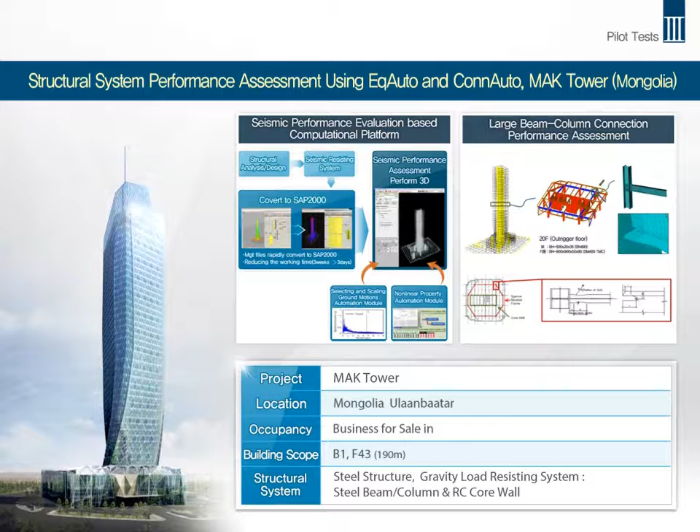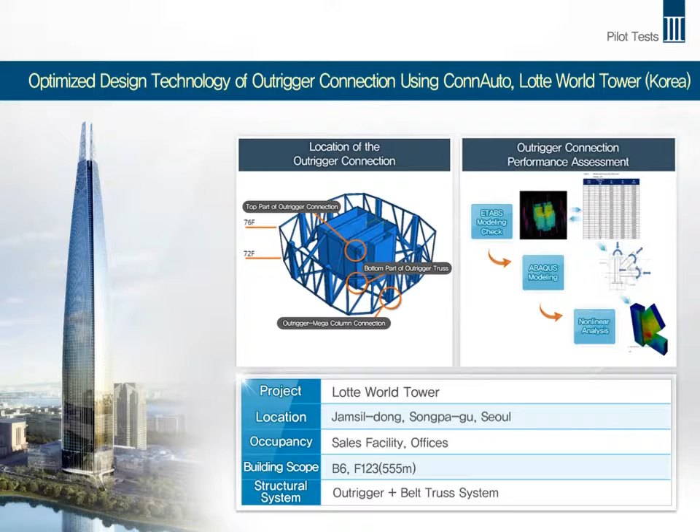Moreover, outrigger joint detail design was performed on the 555-meter-high Lotte World Tower, which will be the tallest building in Korea once completed. In other words, detailed design of complex structural parameters took approximately 70% less time by using the ConnAuto application. The optimal decision was automatically made from a variety of alternatives proposed by the ConnAuto.

This is a data processing platform of an atypical integrated design. Currently, this technology is being applied internationally on large-scale projects. The technology was applied on the 283-meter-high M Tower for optimizing the cross-section size and concrete strength of columns in the super tall building. Total structural frame cost was reduced by 13% by repetitively analyzing thousands of propositions.

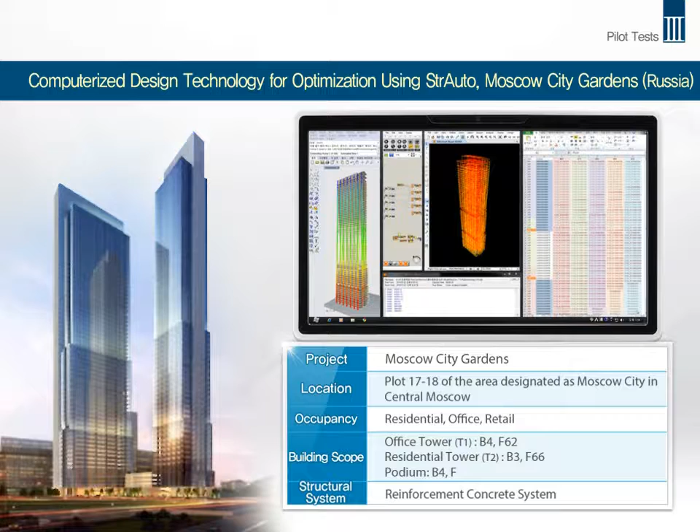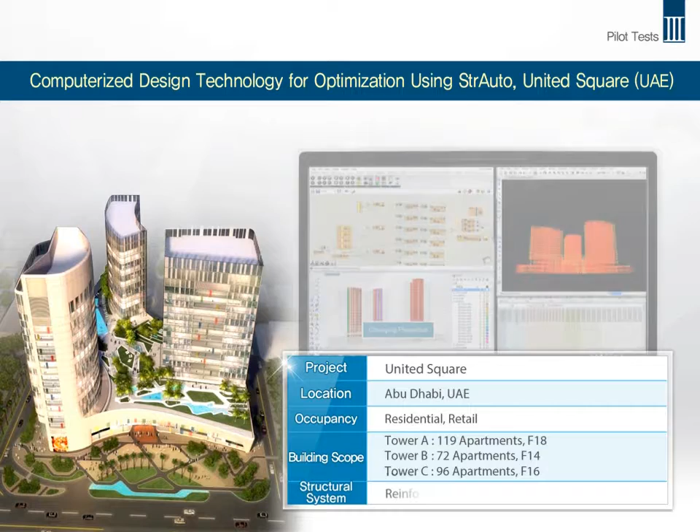The next example is United Square of International Capital Trading in Abu Dhabi. $3 million was saved in the construction by optimizing rebar detail design, load design, concrete strength, and rebar strength.

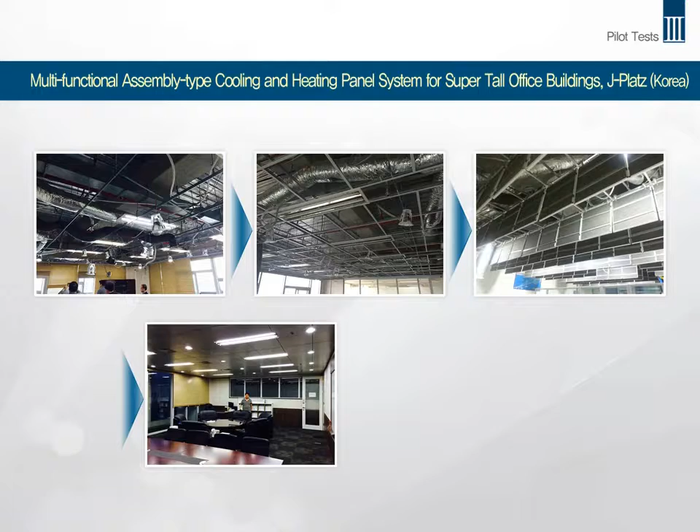The next technology is an assembly-type multifunctional cooling and heating panel system for super tall office buildings, applied on the J-Platz building in Seoul. The developed system provides better quality cooling and heating performance by combining a lightweight aluminum panel and radiant board. Compared to the previous cooling and heating system, this technology reduces energy consumption by 18%.

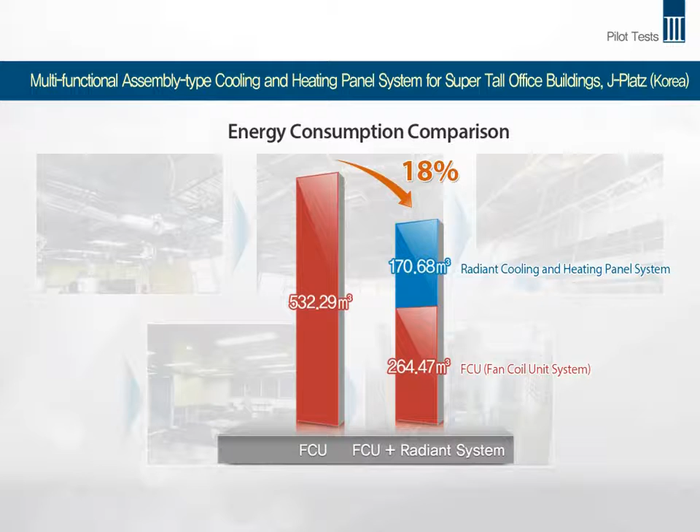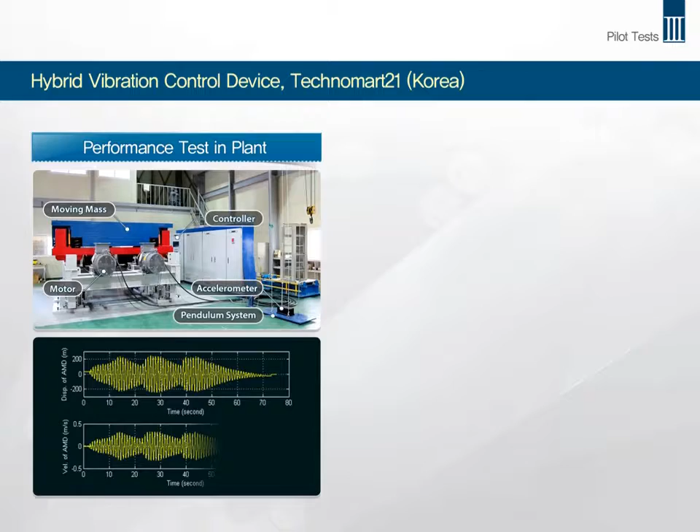The next technology is wind vibration mitigation. Active mass damper technology was secured as a solution for the resonant phenomenon behind the Technomart 21 building incident, which happened in 2011. The world's first vertical and horizontal vibration control device was developed and manufactured with a capacity of 50 tons. A performance test was executed for vertical and horizontal vibrations in 2013.

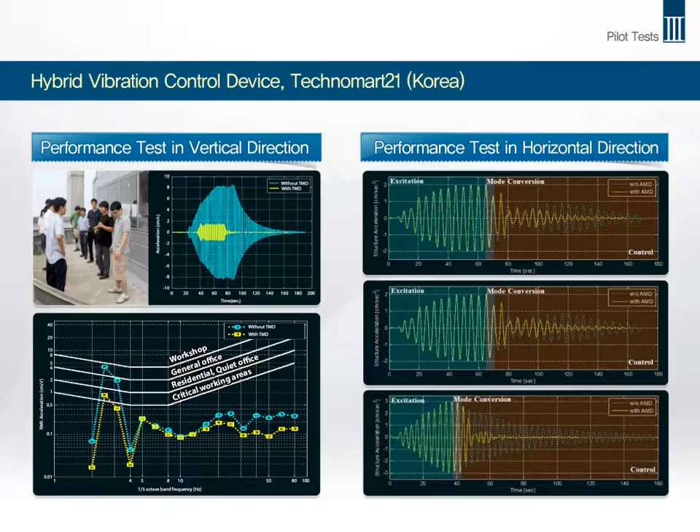With recognition of the superiority of the developed technology, we manufactured and installed vibration control devices on an airport control tower in the third stage of Incheon Airport, and we are currently in the process of an additional pilot test.

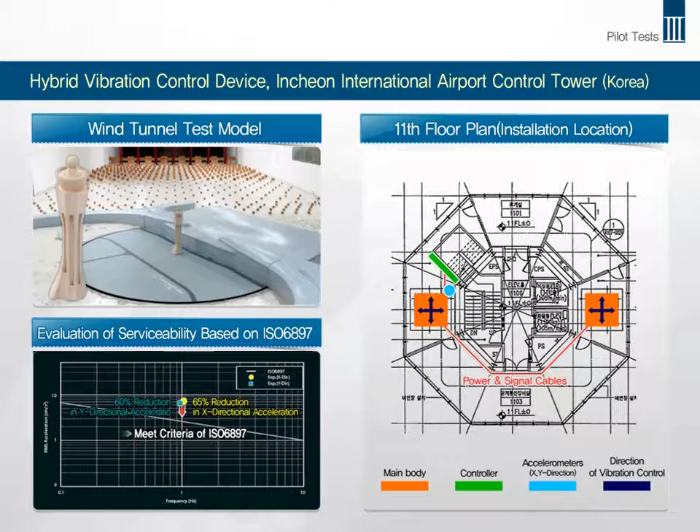The next technology is integrated management technology. This technology was applied to a 33-story high residential and commercial complex building in Jakarta, Indonesia. A $1 million, 5-month contract was made for construction of the smart building. Currently, we are in the stage of applying a smart building solution based on the integrated management technology.

I would like to introduce some of the news reports in broadcast media and press that explain the development process, results, and the social and economical ripple effect of our developed technology.

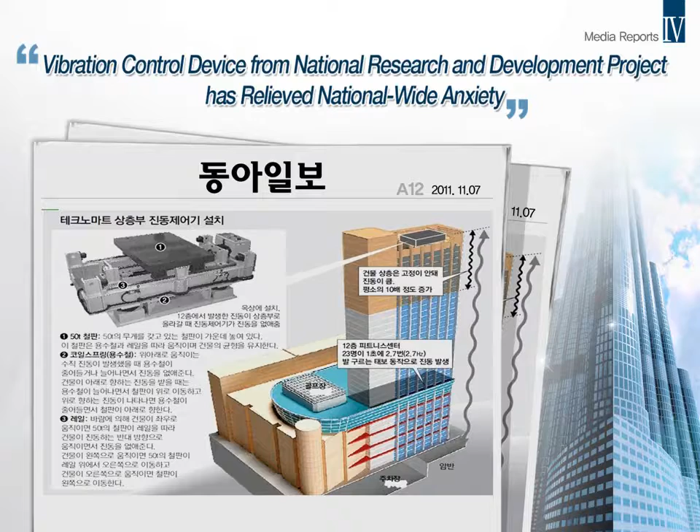One of the 4 major daily newspapers and public broadcasting reported that the vibration control device from the National Research and Development Project has relieved nationwide anxiety resulting from the Technomart 21 building vibration incident. It is one of the successful cases of applying National Research and Development results, which was a big opportunity to showcase our excellent results.

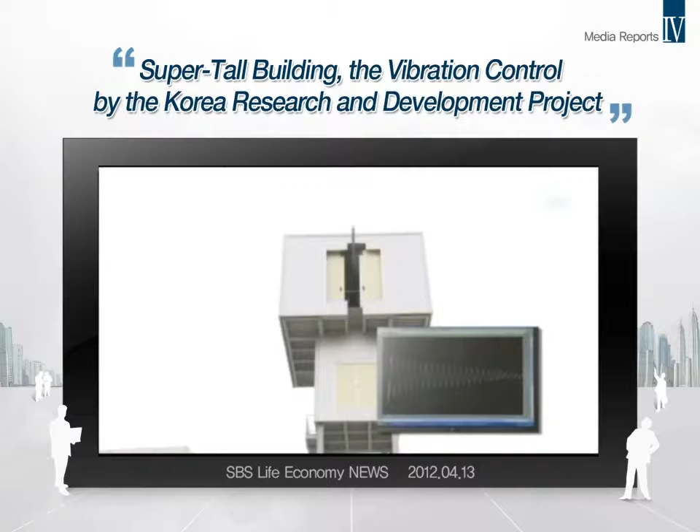Every year, the National Science and Technology Commission selects excellent results for improving the understanding of science and technology and inspiring self-confidence. In 2012, Structural Optimal Design Technology for Super-Tall buildings from an atypical integrated design program was selected as an excellent result of government-supported research and development.

In 2014, our research team that developed the technology for performance improvements of structural systems accomplished the splendid feat of winning the 100 Excellent Results Award with their wind-induced vibration control device technology.

The National Academy of Engineering of Korea, a group of renowned scholars and industry CEOs, publishes reports of science, technology, and industry performance for the past year. Our vibration technology device was selected, and it was the only technology from the architectural field in 2012.

Also, a design optimization technology for an atypical structural system was selected in 2014. For practical use of our developed technology, the development of superior technology, commercialization of developed technology, and strategic marketing promotion are needed.